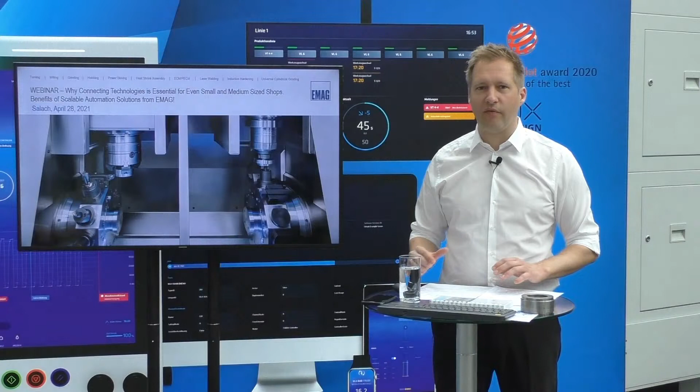Second aspect: EMAG is well known in the automotive industry, in mass production, and we have strong references in the OEM business. But in recent years we made modular machines. One of these modular, efficient machines I will introduce to you live on our shop floor during today's webinar. We didn't only develop modular machines, we also designed modular automation solutions. These price-efficient solutions are, from our point of view, the right answer for small and medium-sized batch sizes. That's why Daniele and I decided to make this the topic of today's webinar.

Before I start the webinar, allow me to give you an overview of the next 60 minutes. We've subdivided the webinar into four blocks. Block number one will be a very brief introduction.

At EMAG in Salach, we are thinking vertical. I would like to let you know the advantages of vertical machine concepts, but also the limits and disadvantages. In the second step, I would like to introduce our Duo concept, and on our shop floor we will show you one VL3 Duo live, introduced directly at the machine.

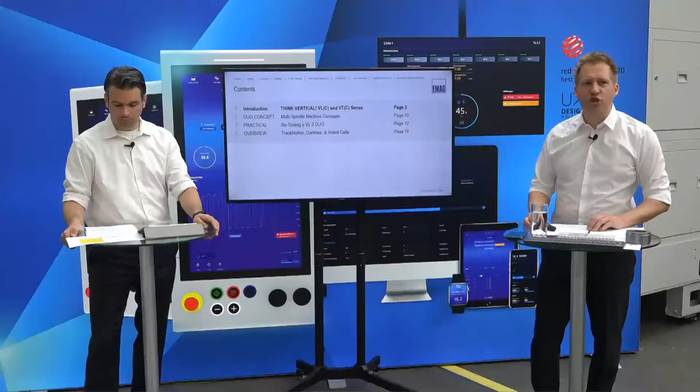Afterwards we come to the main focus of today's webinar: the practical part. We will show you how to switch, or retool, our VL3 Duo from part number 1 to part number 2 — this will be the main topic, part number 3. Last but not least, to make it complete, we will also introduce a quite complex, quite efficient automation solution for mass production. We don't want to focus on mass production or high volume batch sizes today, but at the end I'd also like to introduce some other solutions from EMAG.

So let's start with a brief introduction. EMAG is thinking vertical — it doesn't matter if we're talking about turning machines or other technologies like gear hobbing machines or hardening machines. They very often follow the vertical principle because, as I mentioned, we see a lot of advantages in this machine concept.

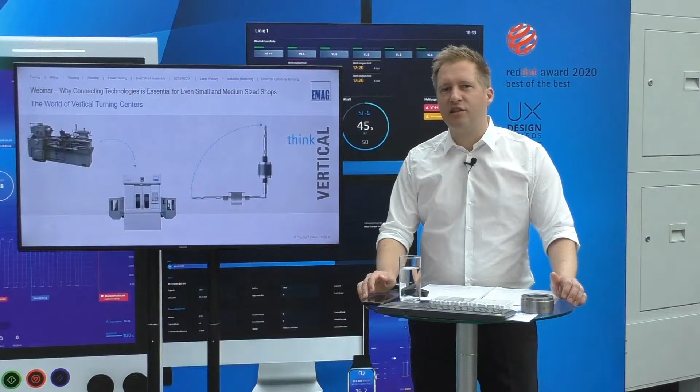By the way, EMAG was introduced to the world market in 1992 during the METAV exhibition in Düsseldorf. EMAG was one of the first machine tool manufacturers introducing a vertical pickup turning machine to the market, and from 1992 to today, EMAG step by step developed into the market leader of vertical pickup turning machines.

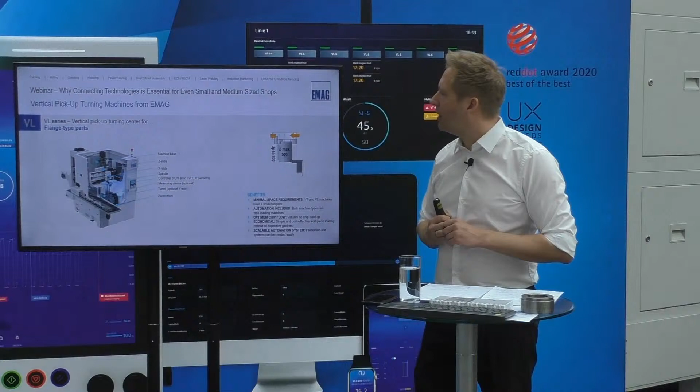Please allow me to briefly give you, from my point of view, the main advantages of this machine concept. I would like to explain this principle on the example of our VL2 machine, one of our entry-level modular machines. If you look at the machine concept, you will recognize that our working spindle, the main spindle, is not horizontal inside the machine. We lifted it up and integrated it into the machine concept as a vertical pickup machine.

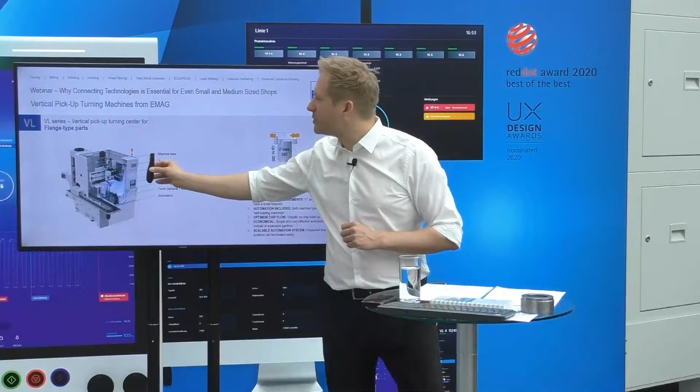This gives the big advantage that the main spindle does not only do the machining process, it is also responsible for loading and unloading the machine. As you can see, with the automation the application engineer can directly put the raw parts on and take off the finished parts. This is always the standard compilation of our VL machine concepts. So the automation is already included in the machine concept, and the pickup spindle does not only machine the part, it is also responsible for loading and unloading the machine.

Optionally, our customers also have the possibility to integrate a measuring probe between the working area and the automation, and this is the third responsibility of the main spindle. So it does the machining process, it does loading and unloading, and it also does the measuring process if this is needed and requested by our customers.

Another big advantage is that if you lift up the spindle to a vertical orientation, the footprint of the machine becomes very attractive, and especially in mass production, or also in medium-sized production, space is very often the limitation for our customers. So this is also a second big benefit of the vertical turning machines.

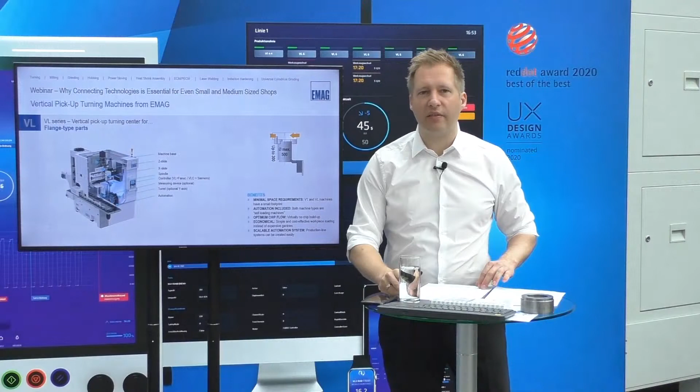Last but not least, we also have perfect chip flow. You can imagine if you have a vertical spindle with the workpiece on top, every chip falls inside our chip bin and will ultimately be carried out by our chip conveyor. So the chip flow is more than perfect, the best solution, and this is very important for automated processes.

I guess the machine concept is not well known by each of you, so please allow me to explain the VL machine, or VL2 machine concept, more in detail using our 3D animation.

As you can see, in the first step we have our chip bin, which is the basis of the machine, and then you can see our column in the middle of the machine as the basement. It's made out of polymer concrete. On the polymer concrete we put our spindle with the guideways and also with the ball screw. On the right side of the machine there is the carrier for the turret.

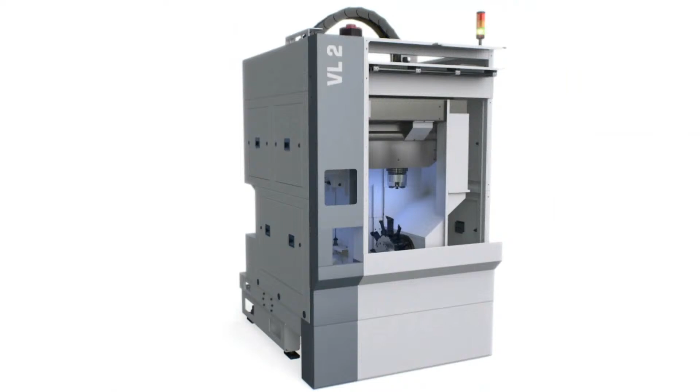Afterwards our turret will be integrated there. It can be equipped with BMT interface or with VDI. Here you see our touch probe, which is between the working area and the automation. And on the left side of the machine you see our automation, which is always standard.

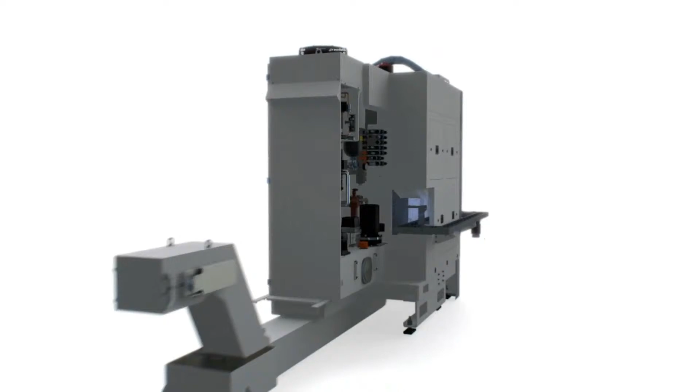If we turn the machine around, on the back we have our electrical cabinet and our chip conveyor. So all components needed to service our machines are easily accessible from the back side of the machine. This is the principle of our machine.

And now, as the last part of the first section of the presentation, please allow me to show you a comparison of vertical turning machines, or the difference compared to horizontal machining concepts.

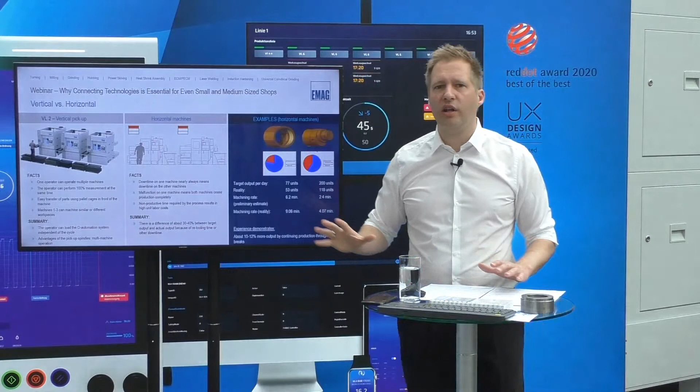These are standalone machines where the operator has the raw parts bin and the finished parts bin in front of the machine, and one operator can easily load and unload, on a manual basis, a minimum of three machines. The machine only needs to be opened for a tool change. So if there is no tool change, all three spindles are always running, and for loading and unloading you do not need to touch the process or open the machine. This is a big advantage compared to horizontal concepts.

If we switch this production philosophy to three horizontal machines, there is a big difference: the door of the machine does not only need to be opened for changing the tools or the carbide inserts.

You also need to open it when you want to change the workpieces. So if one part is finished, you need to stop the machine, open the door, take out the part, put in a new part, close the door, and press cycle start. So you always lose some seconds.

And if we consider different kinds of parts, our experience is that this makes the process 10 to 12 or 15% more efficient, because you do not have these standstill phases of the spindle. So the spindles are always running.

The operator of pickup turning machines can also leave the machines to have a coffee break, or even if there is a 10 or 15-minute break, it will not interrupt the machine, and the efficiency of the process will not drop due to that. So this is a big advantage.

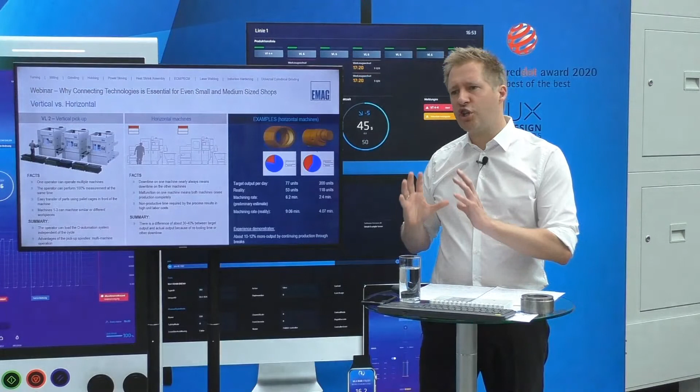Talking machine number 1, a standalone machine, vertical pickup turning machine from EMAG.

Now I would like to introduce to you the practical part. So we decided to show you how to start, how to change, or how to do a tool change for the VL 3 DUO. So at the beginning, I would like to give Mr. Bötzl, or Uwe, the sign so that he starts to run the machine. So Uwe, please start the machine.

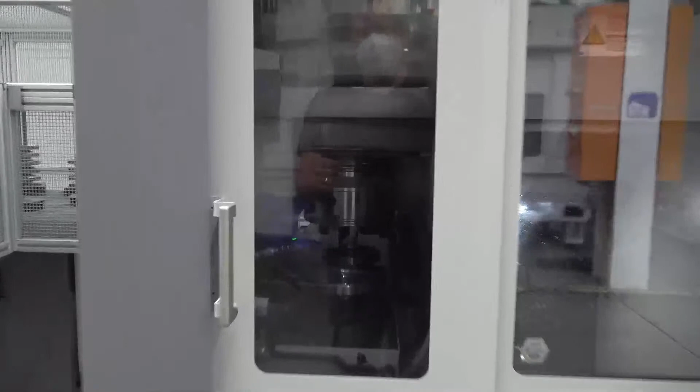In the meanwhile, I would like to give you an overview about what we are doing now. So first of all, just a view inside the machine area.

So this is a pickup, so the spindle picks up the part. Now the machining process is running. Afterwards, the part can be measured, and it will be brought back by the spindle to the pickup again.

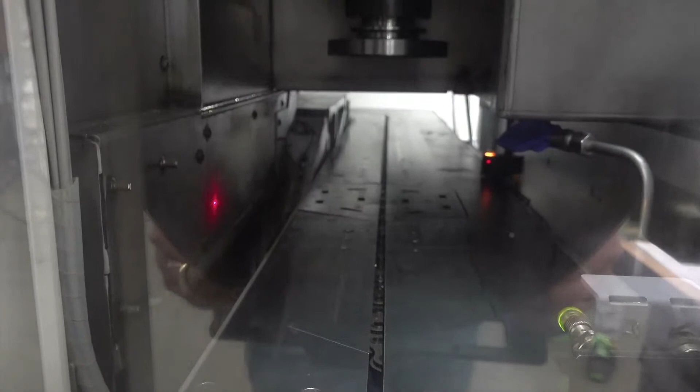So you can see the loading and unloading process, as you can see here now, live at our machine. This is the pickup principle which I introduced to you, and it makes the machine process, also from machine number 1, much more efficient.

So as you can see here, we have 2 different kinds of parts. This part, which is a typical part for EMAG, is a gear. This part is now installed on the machine, and the VL 3 DUO is running this part.

So the track motion is loading and unloading the 2 spindles. It's flipping around the spindles. So the machine is running with a gear.

And the intention of our today's webinar is to subdivide the retooling process into different sections, and to show you that each individual section is very easy to handle. So we will show you how to change this gear to a planetary gear.

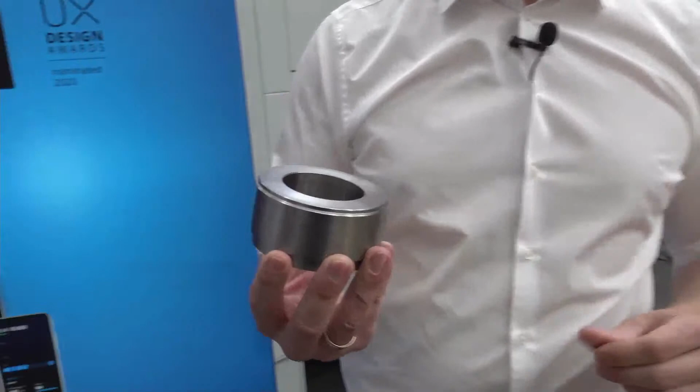So this is soft turning of a planetary gear, OP10, OP20. Step by step, we will show you what needs to be done to do the retooling from part number 1 to part number 2.

So due to the fact that we have the VL 3 DUO inside the shop floor, please follow me so that I can introduce to you the machine concept in detail.

So the VL 3 DUO was introduced to the world market during the AMB exhibition 2016. After the introduction at the exhibition, it became the most successful market launch in EMAG history. We sell around 150 machines a year, so 300 spindles. This is quite a high volume for just one machine type of vertical pickup turning machines, and it simply became one of our top sellers within the group.

What are the reasons that this product is so successful? From my point of view, one of the main reasons is the very small footprint. This is a machine with a working area that enables machining parts of a diameter of 150 and a part length of 110.

And on this small footprint, which only requires 4.6 square meters, you have two separately working areas. Working area number one has one spindle and one turret. Then you have a second working area with a second spindle and a second turret, and they can work independently. Normally, our customers use this machine concept to do OP10, soft turning or hard turning of side number one, and OP20, soft and hard turning of side number two.

Second reason, from my point of view, which makes the VL3 Duo so successful, is our CNC control. The machine in standard is equipped with a FANUC 31i, and this FANUC 31i is in standard equipped with a 4-channel concept.

So you can run working area number one in channel number one, programming the machining process of OP10. On channel number two, you program OP20, the machining process of the second side of the part. In channel number three, you can program our modular automation system, the so-called track motion.

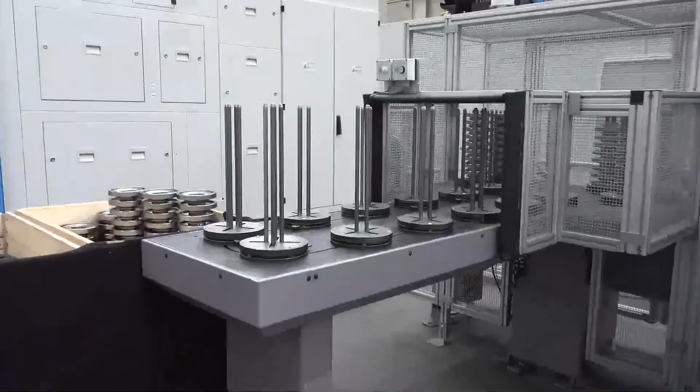I will introduce the track motion to you in detail later. This will be programmed in channel number three, and in channel number four, you will program our raw and finished part conveyor. So only one manufacturer delivers you everything: machine, automation, raw part and finished part conveyor.

And who allows you to run all components and all systems with one control only. If you buy a machine and from a third party automation, you always have minimum two controls, and then you always have to work on the interfaces. Our efficient cell, the VL3 Duo, with a track motion system inside the machine and the raw part, finished part, can be controlled by one CNC only. This is a very big advantage.

Jan, can I interrupt you a second? Sure. What is always important for our customers is they are always curious to see how deep our production of the main components like spindle or turret and everything goes. Can you explain this please a little bit in detail?

Sure, thank you very much. Yeah, this is right. So from my point of view, if you want to deliver high sophisticated automation processes, you need to have the core competence still inside the company, and this is also the philosophy of EMAG. So we have two production facilities, and in all production facilities, we are doing everything in-house from step number one until the last screw.

So we have our own foundry where we do the polymer concrete machine basement. We machine all mechanical parts, for example, of the main spindle, which is always a water-cooled, direct-driven spindle. All mechanical components are machined by ourselves. We do the assembly in-house, and we do the testing in-house.

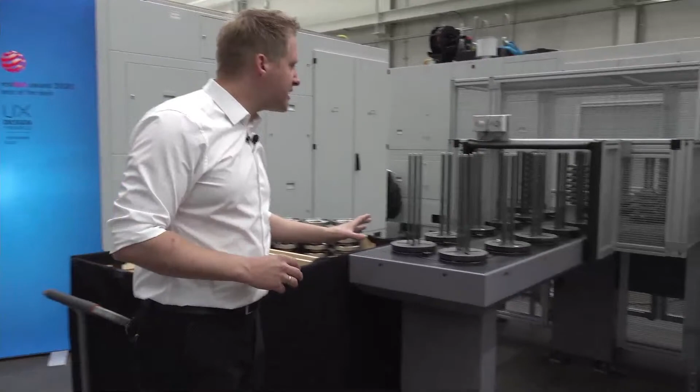So the stacker pallet is a very efficient and easy possibility to stack different kinds of parts. This allows us, in this case, to stack up to 400 pieces on our VL3 Duo. Later, I will show you how easy it is to adjust the diameter of the stacker pallet.

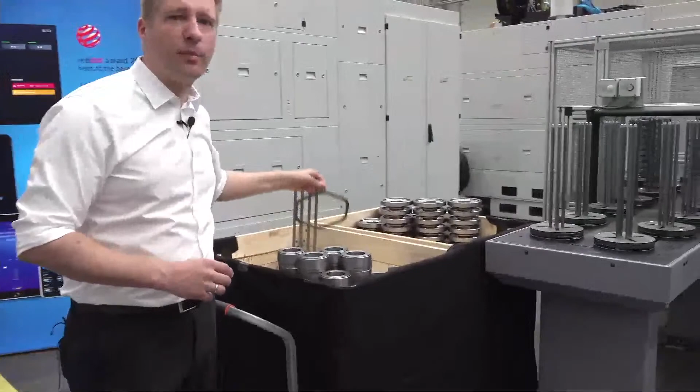So that you can easily retool the stackers and change them for different kinds of geometries for your workpieces. You see currently that the machine is equipped with stackers, but it's also possible to equip the machine with a more simple solution, a so-called carrier, and this carrier can also be added to our conveyor, which, by the way, is also designed and manufactured in-house.

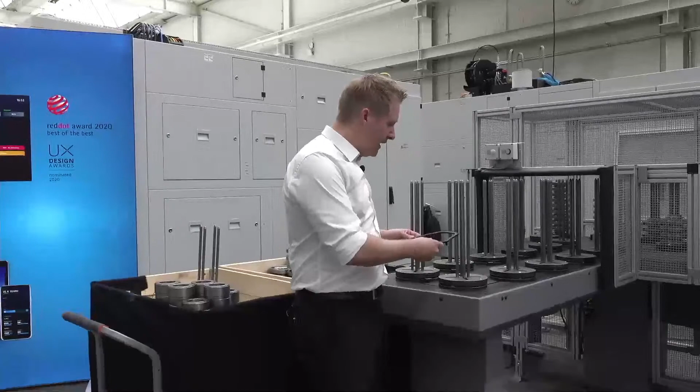So this is also our EMAG solution, and in standard, it always has a chain which is driven by a motor. Inside the elements of the chain, you can easily take off the stackers, and you can also equip it and run it with these simple carriers.

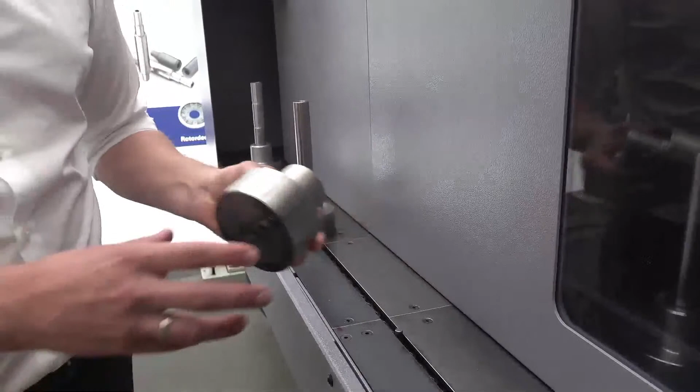If our customers have the requests in order to not destroy or scratch the parts, normally our customers go to pallet solutions. I can show it to you at the neighbor machine. For example, for shafts, our customers, or even we deliver it to our customers, there's a possibility to do different kinds of pallets. Same concept, there is also a chain, and you can easily add these pallets to our conveyor system. Different solutions, whatever the customer needs, can be realized by EMAG.

Now I would like to kindly ask you to follow me to the back of the machine so that I can introduce to you the track motion, the automation system, more in detail.

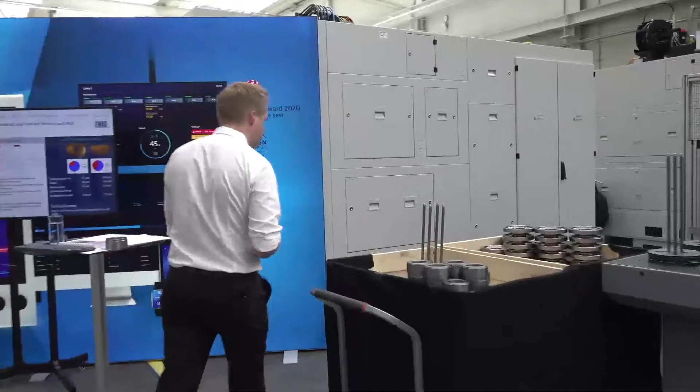First of all, our modular machines always have a tunnel behind the working area as standard. This tunnel can be used for automation processes. So if you want to use the machine with a conveyor only, for example a VL2 which I introduced earlier, then this tunnel is covered by a metal sheet.

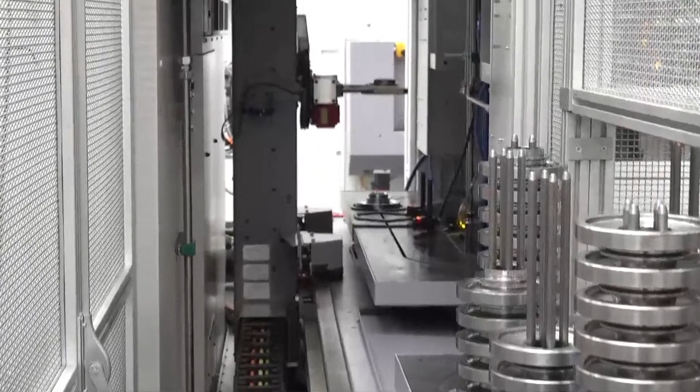But if you want to do an automation process using our track motion system, you simply open it, or we open it for you, and we integrate our track motion solution directly inside the machine concept.

If I put your focus a little bit more on the track motion, you have to know that we have two main components. Component number one are our so-called tracks, which are standardized and come in sizes of 300 millimeters, 600 millimeters, or 1,200 millimeters. These standardized elements allow us to design automation solutions dedicated to your individual needs.

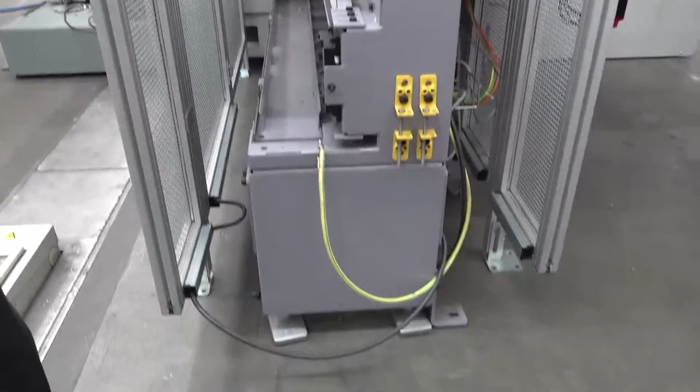If you need it 1 meter longer or 600 millimeters longer, we can simply do it. You can add whatever, a washing device. So we are very flexible in this regard, and these tracks are main component number one of our track motion. The second main component is the so-called translift.

The translift is responsible for picking up the raw part, bringing it to the machine, taking off the pre-finished part from spindle number one, flipping it around by 180 degrees, and bringing it to spindle number two.

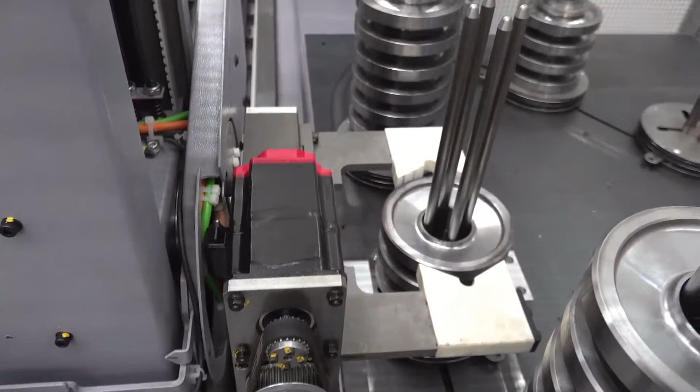This is a solution which we have sold more than 1,000 times around the world. This is our solution number one, which we can offer you as a very flexible and very modular solution.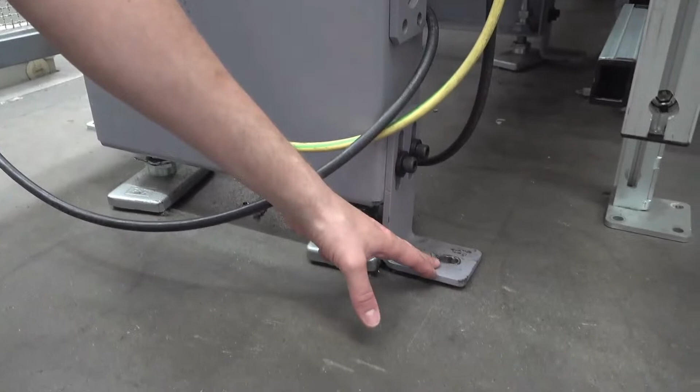In this context, I need to let you know that the track motion you see here is not running full speed. This is a customer machine, and we cannot fix all track motions for each individual customer here. As you can see, the tracks normally need to be mounted or fixed at the production hall, but just for doing the pre-acceptance, normally we are not doing it, so you cannot run the track motion at full speed.

You have to consider that the speed of the x-axis of the track motion is up to 150 meters per minute. You need a high acceleration, and it needs to brake down in quite a short time. This is only possible if you fix the track motion in the production hall.

But we decided that this is not the main focus of today's webinar. We don't want to show you the feeds and speeds of the track motion. We want to show you how easy it is to change from one part to another. That's why we said, okay, we accept it, we explain it. This is what I did now.

But I can show you a video, and that's why I would like to go back to the presentation screen again, just to show you how fast the track motion is normally running in the production at our customers.

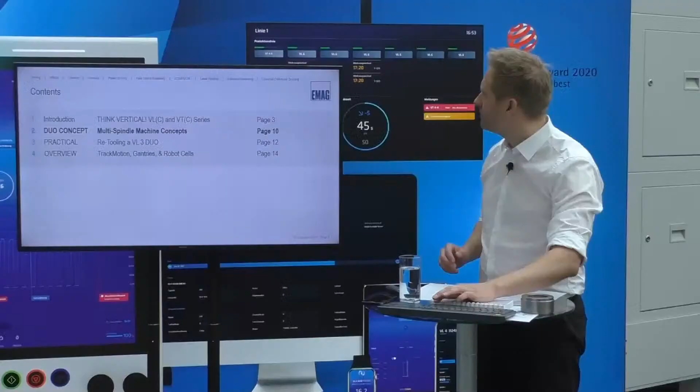Before I start with the video, let me introduce to you the main technical features of our track motion. We always have two different kinds of sizes. One track motion size is the so-called track motion 4-20. The 4 means 200 millimeters workpiece diameter maximum, and a workpiece weight of 20 kilograms.

We also have a stronger, bigger sister of the TM4, the so-called TM8-70, which can handle parts up to a workpiece diameter of 400 millimeters and a maximum workpiece weight of 70 kilograms.

As I told you, most important is the acceleration, or the speed of the x-axis. Our customers normally run the track motion at full speed, which means 150 meters per minute. If you consider that the x-axis of the VLC Duo has 60 meters per minute, this is more or less 3 times higher. So you can imagine what forces we are talking about, and this is only possible if you fix the tracks inside or at the production hall floor.

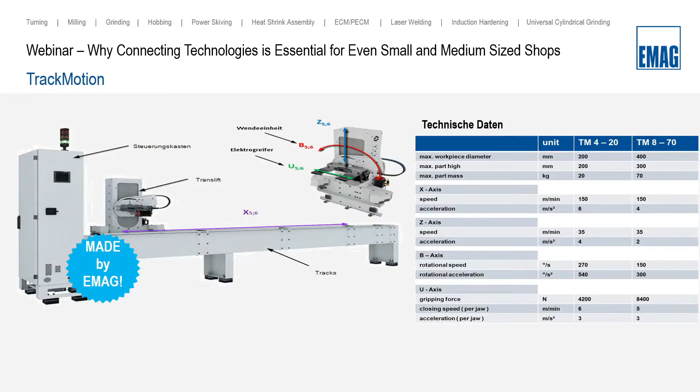Last but not least, I would like to mention you can also add a second translift on our tracks. Whenever the cycle time is quite small, sometimes you need a second translift in order to handle the automation. So this is also possible. You can add a second translift, and then one translift hands over the parts to the second one, and this makes the automation process even more efficient. But this will be calculated by our specialists if one or two translifts are needed.

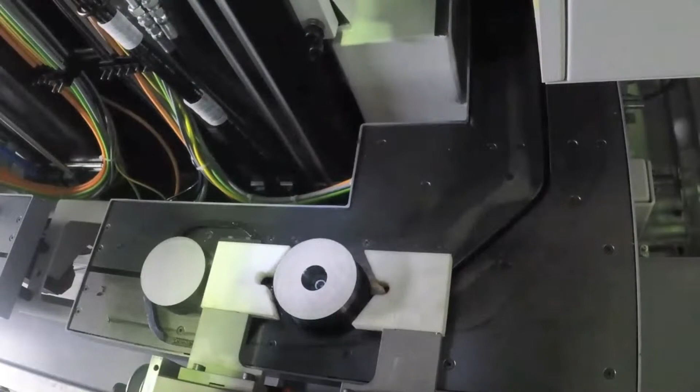Now I'll show you the video. This is a full speed track motion video. The track motion is picking up the pre-finished part of spindle number 1. It flips around the part, hands it over to the L conveyor of spindle number 2. Then the finished part is being picked up, and the track motion is going back to the raw and finished part conveyor.

Again, raw part is picked up at the stacker. It is handed over to spindle number 1. Then the pre-finished part is picked up, flipped around by 180 degrees. It will be brought to spindle number 2, and then full speed back to the conveyor. Yeah, this is what I wanted to show you.

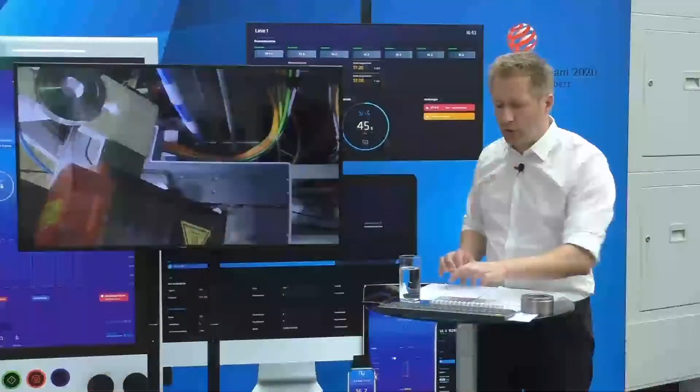I think it makes sense, as we have seen from Björn, this kind of solution makes sense from 20 to 50 parts to automate when we have a standalone machine. When we have high volume, speaking of the automotive business, up to 100,000 or more, or million parts, we use linear gantry automation and also robot solutions. But it depends also on the philosophy of the customer. If they have more of a philosophy to use gantries or robots, it depends on the footprint or other issues, or requests from the customer side.

No, that's it. As you just mentioned, for a standalone machine, from my experience, 20 to 50 parts is a good volume to start with. So whenever you have enough parts to fill the O conveyor of a VL2 machine, for example, it already makes your process efficient, 10 to 15% more efficient than a horizontal turning machine. And this machine, the VL3 Duo, now with the stacker system, has a capacity of maximum 400 parts. So this is the right solution for 200 to 400 part pieces. And if it goes to thousands and millions, you can be sure that we also find the right solution for you.

You're absolutely right. Now I come to the main part of our webinar. This is the retooling of part number 1 to part number 2. This is the right point to hand over to Uwe and give Uwe the sign. So Uwe, please start the retooling process.

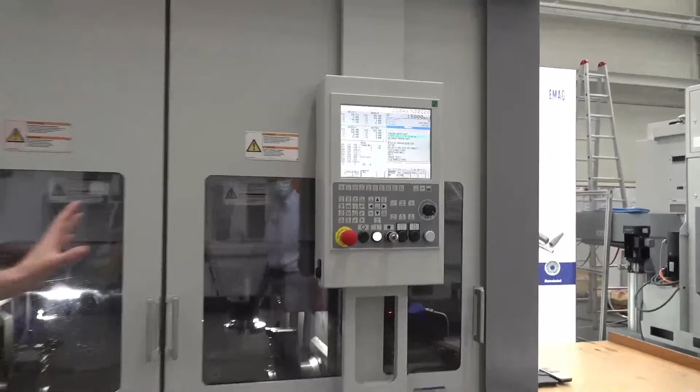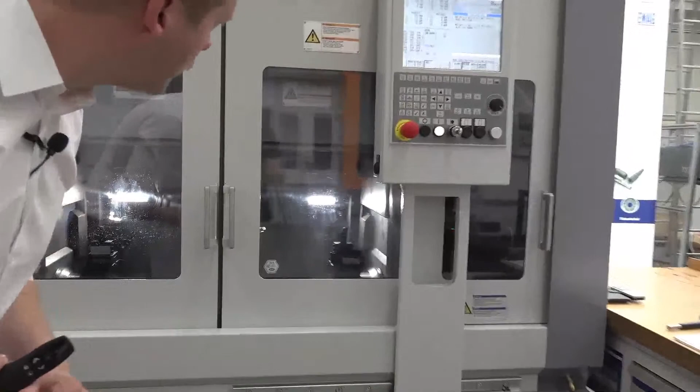And then we will show you what you need to do in order to change the part in the next steps. So Uwe, is the machine still running? As you can see, spindle number 1 is already finished. Spindle number 2 is also already at the pickup. So it can only be a question of a few seconds until it's done. Okay, so now it's done. He's pressing the reset button. And then the first step of interrupting the machine is done.

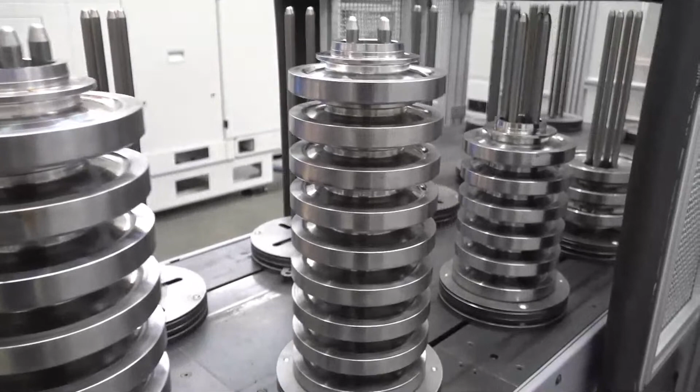Afterwards, we need to ensure that we have access to the finished part of process number 1. As you can see, Uwe is manually rotating the stacker pallets so that he has direct access, and that he can take off workpiece number 1 and put on the second part manually. So we are still in the manual machining process.

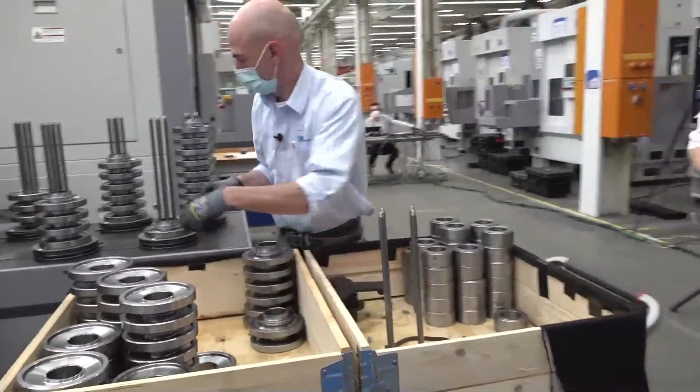Now Uwe is taking off the parts, and he's putting on part number 2. This takes some more seconds, so I would suggest we let Uwe do his job.

In the meantime, I will introduce to you the machine concept of the VL3 Duo based on a 3D animation. If you want to understand how the machine works, I think it's worth having a look at the automation process.

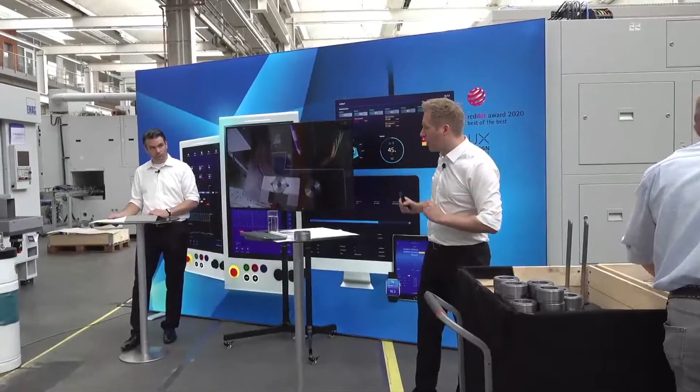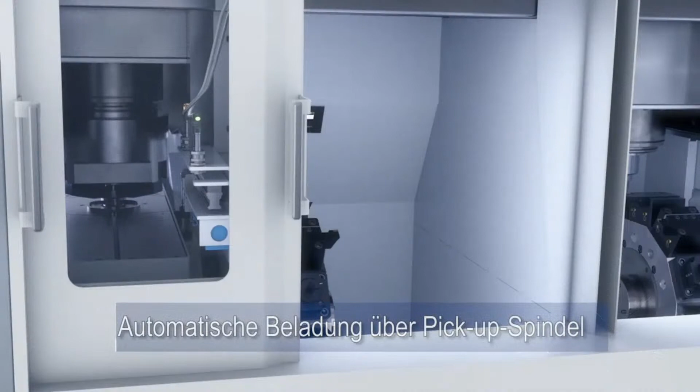This is the VL3 Duo, which I just introduced directly on the shop floor. You see the machine, the raw part and finished part conveyor, and in the back you see the track motion. The pickup spindle takes out the pre-finished part and picks up a new raw part. Now you see machining process number 1, the OP10 of the first side of the part.

This is a part which we also integrated into our webinar, a planetary gear where you perform internal turning processes and outside OD turning processes. Afterwards, there is a measuring process, which you can see here.

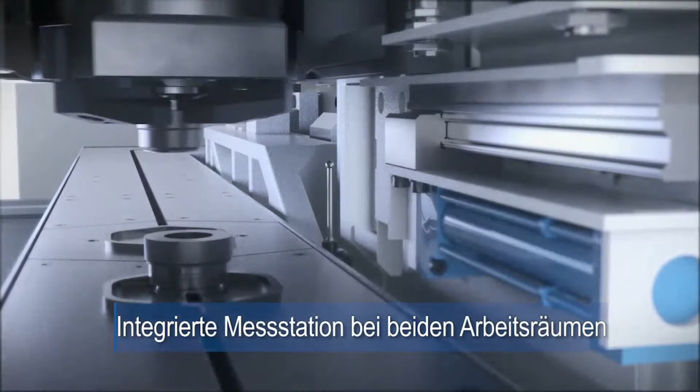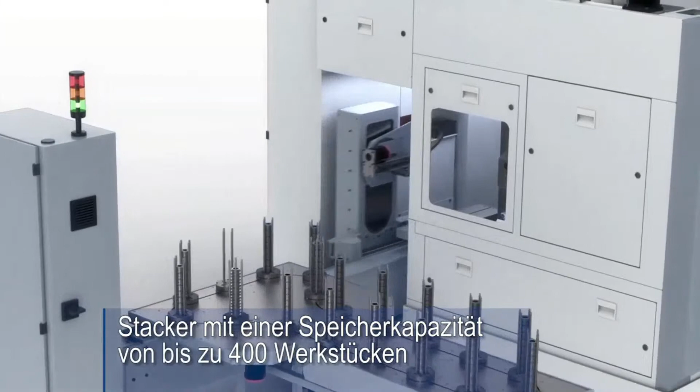After the translift brings the finished part to the raw and finished part conveyor, you can see that the pre-finished part is ready to pick up for spindle number 2. It is clamped in the ID, and now you can see the machining process, the soft turning of the planetary gear on the second spindle.

I think if you understand this kind of machine process or machine concept, it makes it much easier for you to follow the next steps.

I just received the sign from Uwe. The stackers, as you can see, are now empty. The machine is still in manual mode, it's not running. The next step Uwe is doing now is starting the cycle to take off all parts of the whole process chain.

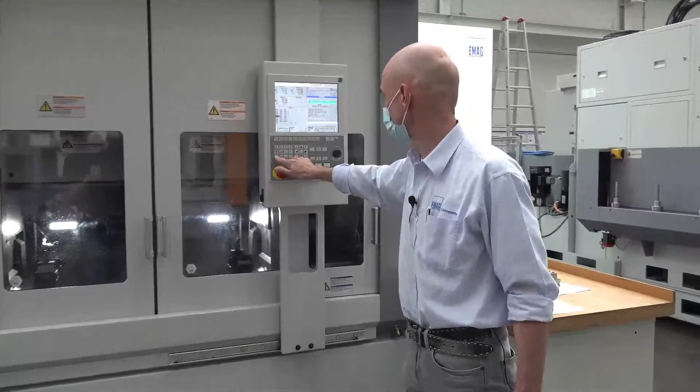In step number 1, in German it's called Leerfahren, some kind of empty running of the whole machine. Please press the button. This is also an automated process.

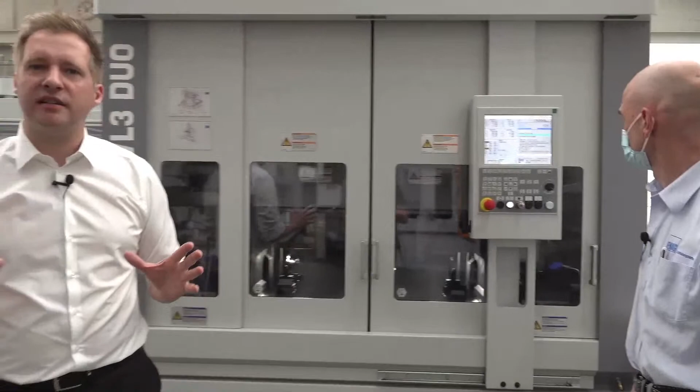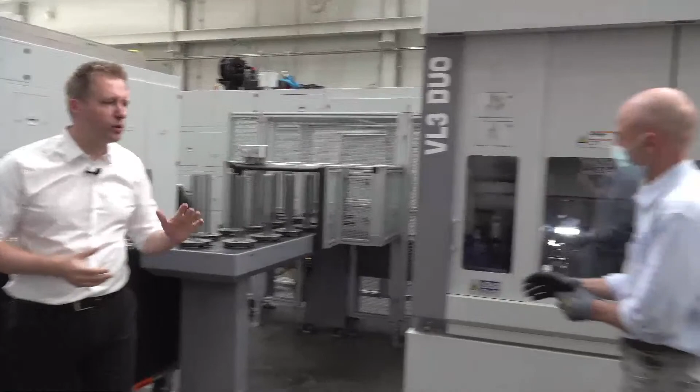This will take some minutes, and in the meantime, normally the operator can use the time to already put on the raw parts of the second machining process. This is also what Uwe will do now, parallelly starting to put on the raw parts of part number 2 inside our stackers.

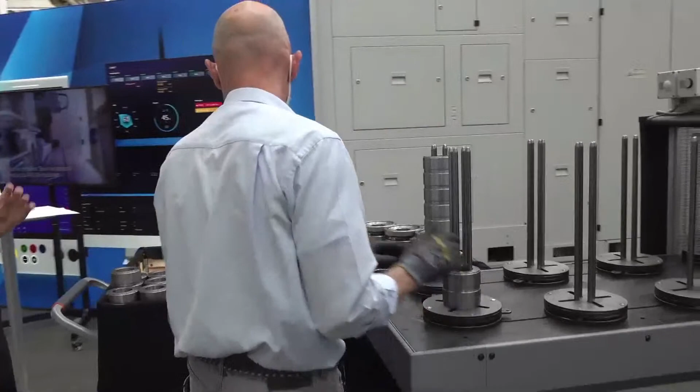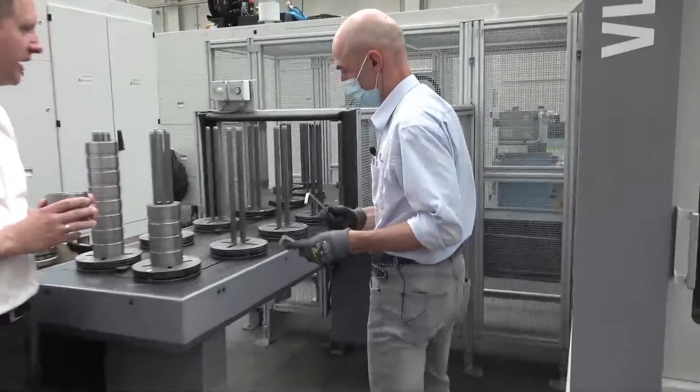While he is doing this, he will equip 2 or 3 stacker pallets with a new part, and we will also show you how to easily adjust the stacker pallets to different kinds of geometries. If you take off the screws, the mechanical design allows you to easily change the diameter of the stacker, so whenever you want to grab parts at the OD, this can be done.

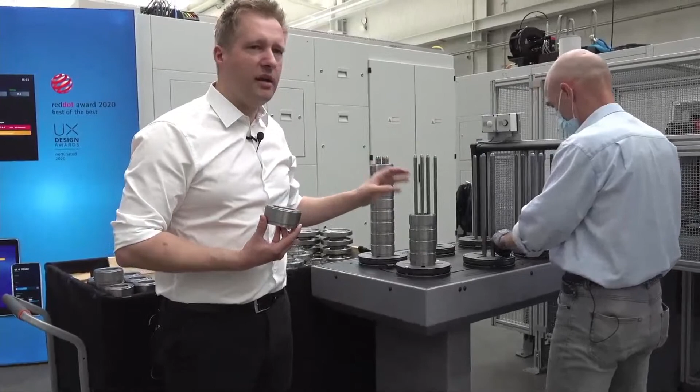If you want to grab parts in the ID, the inside diameter of the workpiece, you can easily adjust it to different kinds of geometries. In order to not need to do it for each different pallet, we decided to use parts where the ID has the same diameter. This is just to save time and not to bore you.

I think you understood how easy it is to adjust the stackers. But we can simply take off part number 1 and put on part number 2, just to make the webinar a little bit more efficient.

Okay, question from our audience, from our customer: We have no experience with such automated process. What support does EMAG provide?

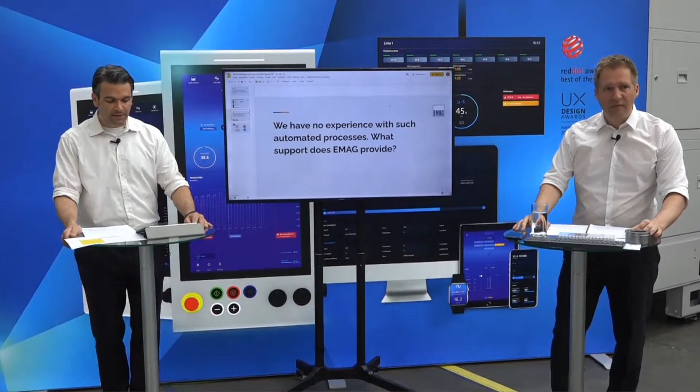We have videos on social media about how to set up machines, chucks, and tools. We also offer the possibility to make trainings when we offer machines. We have our own academy, meaning we can train everybody in mechanical training, individual electrical training, and control training for each solution. We can support you completely in the turnkey solution, and we have the possibility to do a lot of trainings in this case.

Maybe something to add from my side: we can deliver the machine with no technology, and if this customer already has hundreds of EMAG machines, he is normally familiar with the machine concept and can handle the machine on his own. If you as a customer want to enter the world of vertical pickup machines, it definitely makes sense to get the machine running with your individual part already.

You can also do trainings at EMAG Salach here in Germany, or you can do it in-house. We also come to your facilities if this is requested. You will always get perfect documentation of the machine and especially of the control.

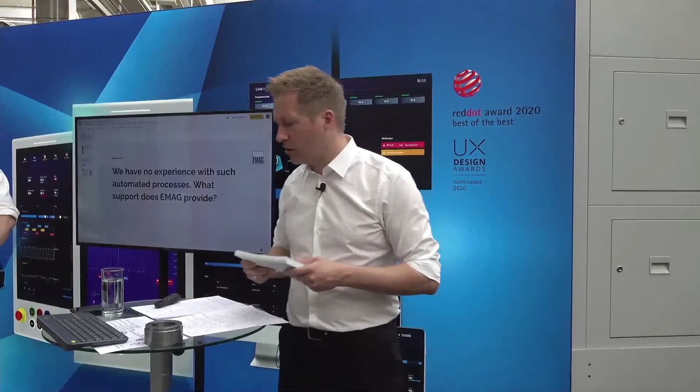So I just received the sign from Uwe. As you can see here, just a quick view: we changed already the stackers. Part number 2 is now manually put on the raw and finished part conveyor. This is normally sequence number 1, which hopefully shows you that this is no rocket science and easy for everybody to follow.

In a second step, our customers change the chucks, or in most cases the chucks do not need to be changed - very often only the jaws need to be changed, and this is what Uwe is doing now. On the left side of the machine we have a 3-jaw hydraulic chuck with quick change jaws, and on the second side we have a chuck with a spindle and a mandrel, which clamps the device inside the bore. Different kinds of chucks, but this is quite common what we see at our customers very often.

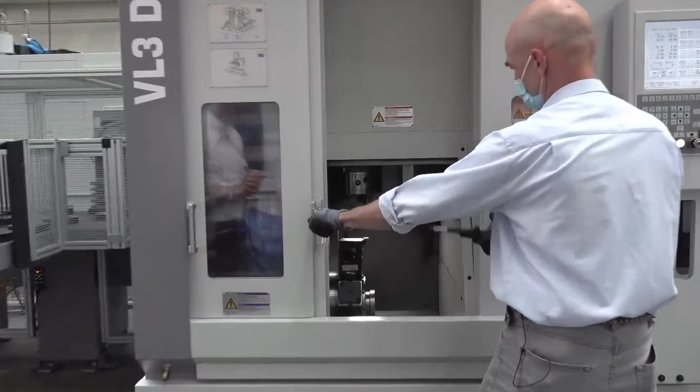On one side, OP10 clamping outside with a simple 3-jaw hydraulic chuck, and spindle number 2 mainly is equipped with a hydraulic chuck and a mandrel. So you can see that Uwe now needs to change the jaws of the chuck.

In some cases there is also sometimes the need to change the chuck completely, so you do not need to be afraid of this. Due to the fact that time is limited for the webinar, we didn't want to show it to you here, but I'd like to invite you to visit our YouTube channel, which is flooded with several different how-to videos, one of them being how to change a chuck. You can easily see that if everything is prepared, it takes maximum 15 to 20 minutes to change a chuck completely.

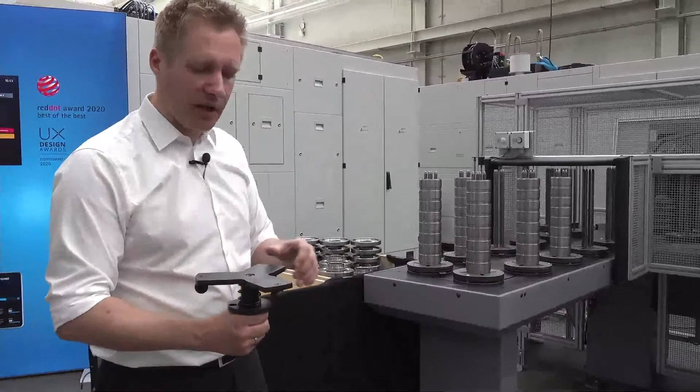Normally, if you need to do that, you make use of this supporting device, which is included into the interface of our turret, either VDI 40 or BMT 55. You drive with the spindle over this device, take off the screws, and put the chuck directly on this device. Afterwards the operator can take out the chuck and put on the new chuck also on this device, go with the spindle inside, fix the screws, and the chuck change is finished.

As I just mentioned, it's not part of our webinar today, but please feel invited to visit us on the YouTube channel and see how easy this can be done as well.

So in this case, Uwe, one moment. We do not need to change anything at chuck number 2. This is because the geometry of part number 1 and part number 2 are very similar, so the inside bore is the same. Normally customers only need to change the mandrel, which is not a big deal, and that can be done now. So for our practical part, we are finished with the adjustment of the chucks, and now I would kindly ask Uwe to move ahead.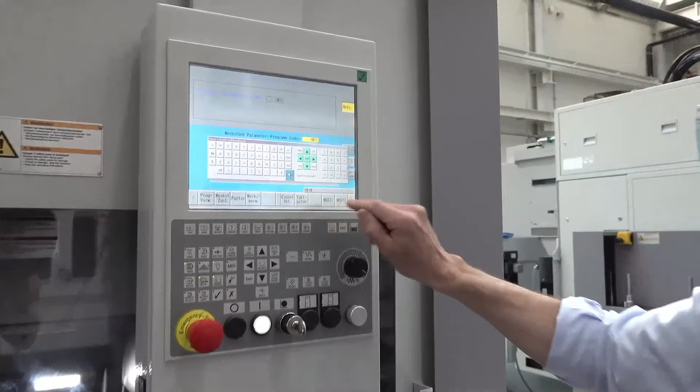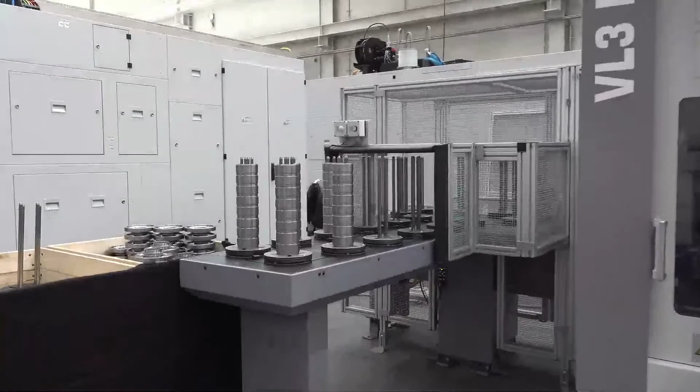So now we need to go back to the automatic process again. Uwe needs to make some smaller adjustments. One adjustment, for example, is he needs to inform the control which stacker pallets are equipped with new parts. Each stacker pallet has an individual number, and he now needs to say, for example, the first pallet which needs to be addressed by the track motion is number 8. He simply gives this information to the CNC control. Afterwards, he needs to press some buttons to accept different things, so the machine can be sure all the needed jobs have been realized by Uwe. He has to accept several things, all the things you saw here. Now he already pressed the button, and we start again the automation process. So the machine knows exactly which stackers are equipped with parts.

So he's now bringing the right pallet to the pickup station, and then the translift of the track motion is doing its job. If there are enough parts on the stacker, you can leave the machine overnight. That's why this machine is quite a success worldwide, and why our customers like this machine concept. It's not difficult to adjust everything, and if the machine is equipped with 400 parts, you can simply run it overnight without any application engineer beside the machine.

Jörn? We have a new question for our customers. The question is: am I not much more flexible with 2 machines than with 1 double spindle machine? With 2 machines, only 1 machine stands still when the other is set up. We have the benefit that in a double spindle machine, each machine has its own control. That means we can set up the machine on the left side while the right side can still work independently. So you don't have to stop both areas - one area can still work while you set up the other. Each machine or working area has a separate channel.

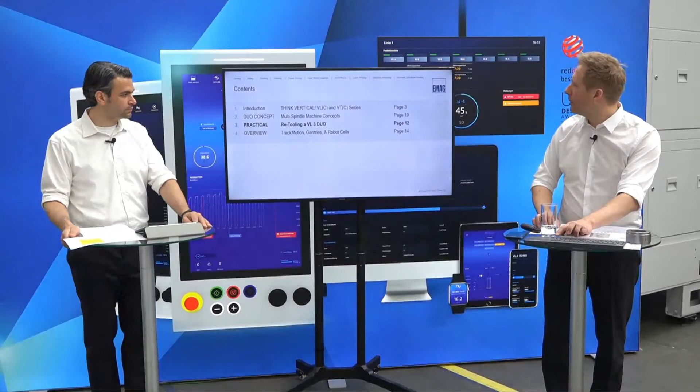So I give you a quick overview about the vertical thinking of EMAG. I introduced to you in detail the VL3 Duo, and I showed you directly on the shop floor our machine cell, the VL3 Duo with the track motion.

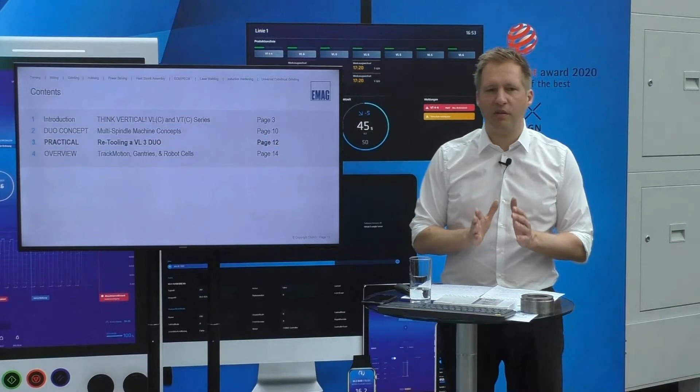In the third step, I showed you that if you subdivide the retooling process into different sequences, each sequence is easily handled by our customers. So I think you're not scared about these kinds of machines, but maybe after this webinar you feel much more comfortable, and maybe more open to think about these kinds of machining processes.

Now in the last step, I would like to show you some pictures of different kinds of automation solutions which we offer. So from simple to complex, I would like to start with the standalone machine concepts, which I introduced to you at the beginning of my speech.

A lot of our customers purchase standalone machines, and they benefit from machine number one already, due to the higher efficiency from the fact that the spindles are never standing still. This is what I think you understood during my presentation in the beginning.

Module 2 is the medium batch size solution. This is normally the integration of the track motion inside the machine concept. You can put 2 machines, 3 machines, or even 10 machines in one line, and you can use the same technology—turning machine OP10, OP20, OP30—or you can change from technology to technology: first machine turning, second machine gear hobbing, third machine roll chamfering or chamfer cutting.

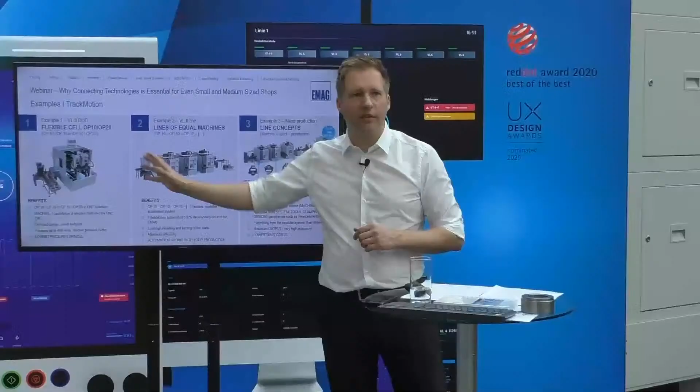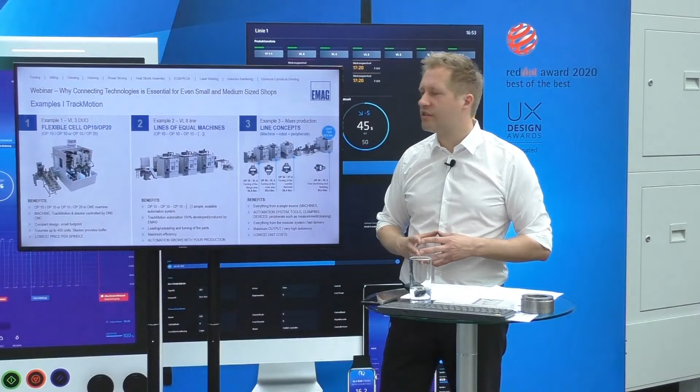These are different kinds of examples as well, examples for track motion. The left side, number 1, you already saw within our webinar, the VL3 Duo, OP10, OP20 in one machine. I forgot to mention you can also use the machine with OP10 on spindle number 1 and spindle number 2. This is the entry level of getting familiar with our track motion modular automation system. As I mentioned, you can add the same machines in a row, OP10, OP10, OP10, so whenever your batch size increases, you have a flexible automation solution which can increase as well.

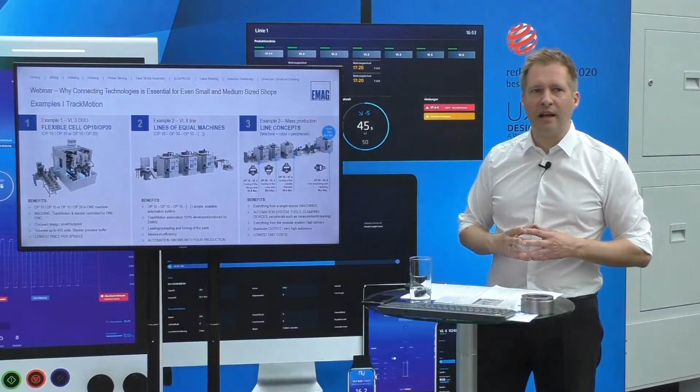Another example is a diff case, which normally has 4 operations, and here you can add different kinds of machines: 2 flange turning machines, VL4, then a shaft turning machine, a VT4, and last but not least, again a VL6. But it can also be a different high technology VSC machine. We are very flexible, and if you come with a drawing of what needs to be realized, we will give you the best solution from our point of view, customized to your individual request.

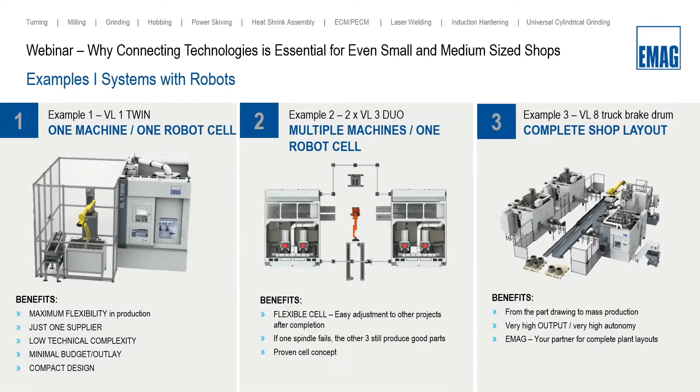Last but not least, 3 different kinds of robot solutions: 1 machine 1 cell, 2 machines 4 spindle 1 cell. We also made a complete hall layout for one of our customers in China, who purchased 48 VL8 pickup turning machines for workpieces up to a maximum 400 millimeter diameter. This customer asked us to design the whole production hall layout to machine brake drums for trucks.

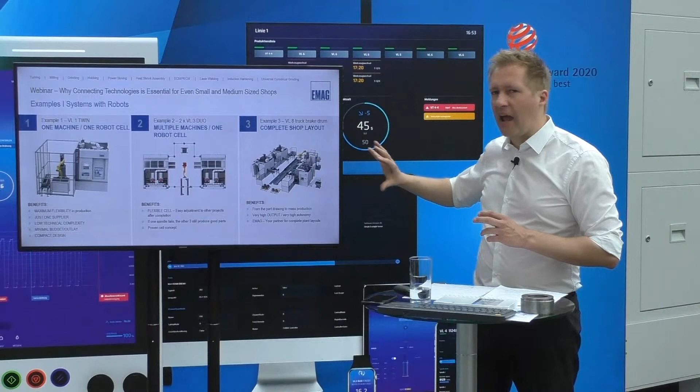Due to the high volume, we decided to put the robot on linear tracks, very similar to our track motion. We delivered everything, including the balancing unit, produced and designed by EMAG. So we produced and designed everything for the customer, so he now has 48 machines running 24/7 doing brake drums.

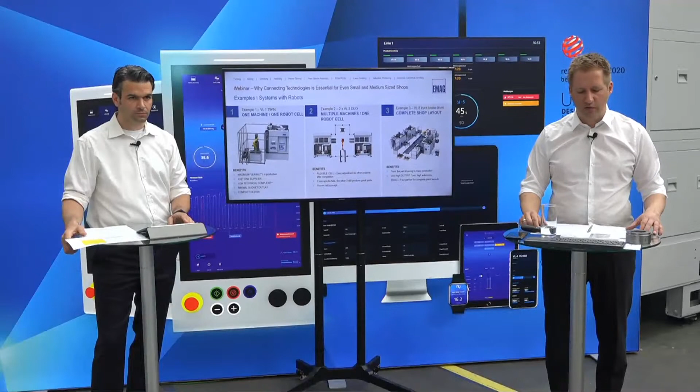That was the end of my presentation. As I told you, we decided to focus on small batch sizes, our standalone VL2, 4, 6, or 8 machines, so we have different kinds of sizes. This was the focus of the webinar. At the end, I simply wanted to give you some ideas about what can be expected from EMAG on top.

Any other questions about quality? How is quality control implemented in automated machines? We have the possibility, like in the VL3 Duo, to implement a gauge or gauging unit. That means behind the machine, or on the left or right side, there's a gauging unit with an interface to our control, where we can measure each diameter or tolerance and give direct feedback to the control. Or we can implement a measuring probe in our machines, which can also measure diameters and lengths and correct them. But the measuring probe is not a measuring machine, it's only for rough diameters and rough lengths. These are the possibilities from our side to implement quality into the machines.